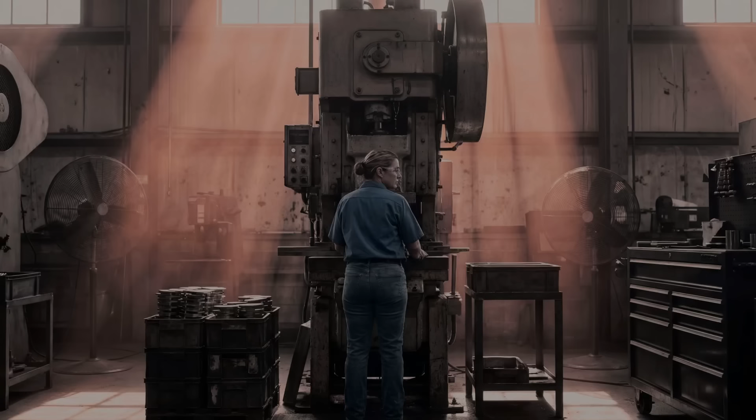In 1998, a 43-year-old woman in Iowa was operating a punch press at a machining facility on a hot June afternoon. She had worked at the plant for 6 months. The press was a simple machine. It held an upper die and a lower die, and when she stepped on the foot treadle, the ram came down with several tons of force, punching a shape out of a sheet of metal.

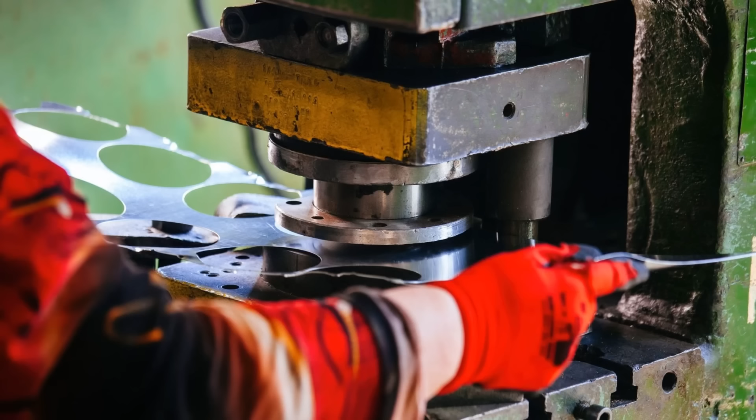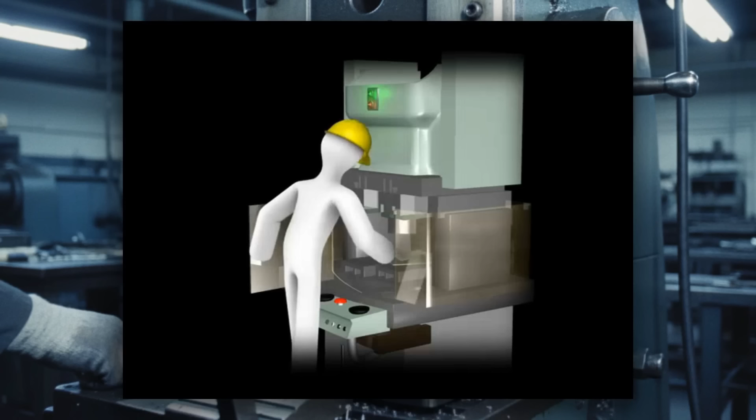The cutout piece, called a knockout, was supposed to drop through the die into a scrap tray below. This time, the knockout did not drop. It stuck. She reached in to clear it. What happened next took less than a quarter second. The ram came down again.

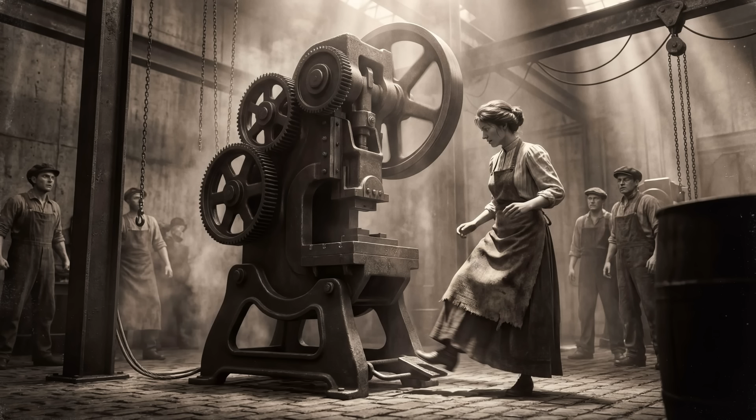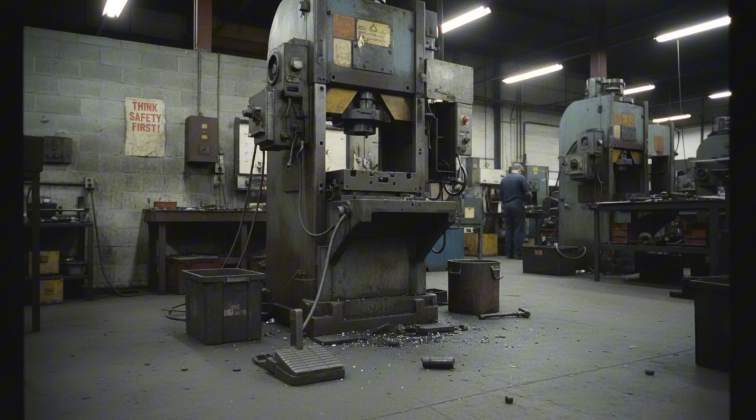The investigation could not determine whether she accidentally bumped the foot pedal or whether the press repeated on a mechanical fault. But the press cycled and the ram struck her in the chest. She was transported to the hospital and pronounced dead 90 minutes later. The scrap tray that should have caught the knockout had been removed from the machine, defeating the one barrier between the operator and the point of operation. She was killed by a piece of scrap metal that should have fallen through a hole.

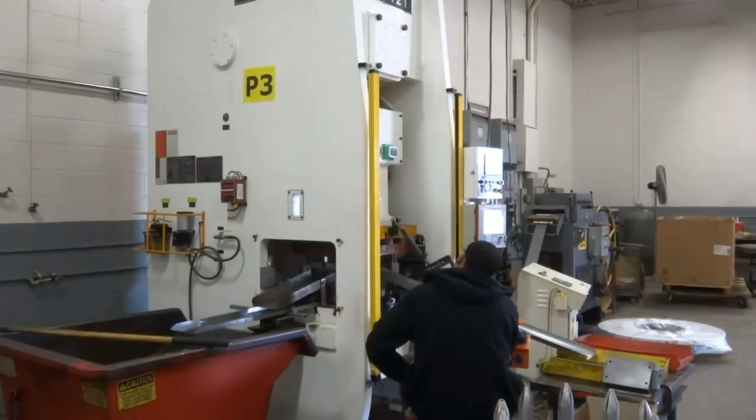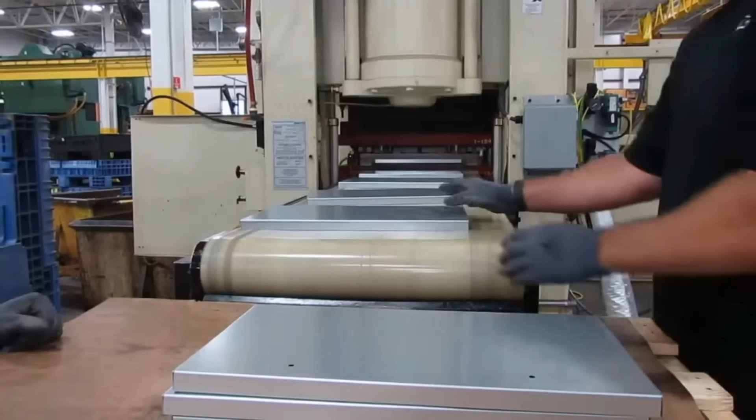That was the punch press. A machine so fundamental to modern manufacturing that every car you have ever driven, every appliance in your kitchen, every steel cabinet, filing drawer, and electrical box was born from one. And a machine so efficient at destroying the hands of the people who operated it that federal safety investigators called it the leading cause of workplace amputations in America.

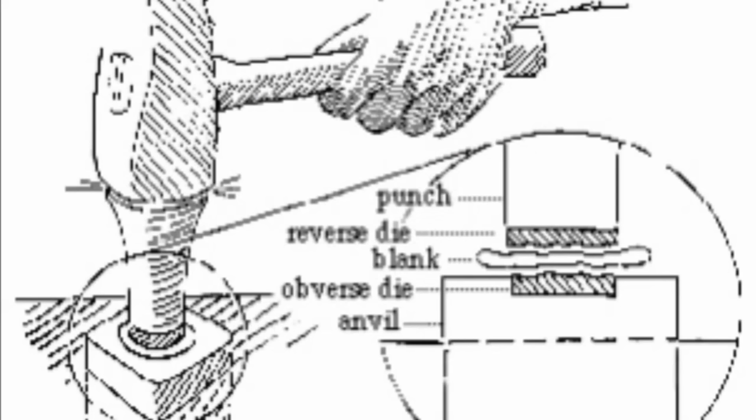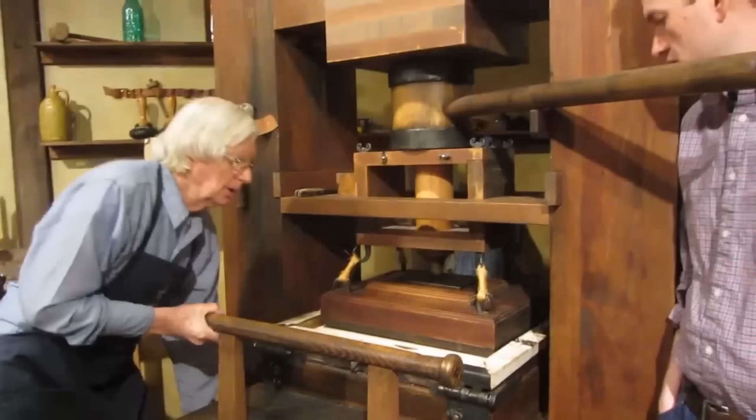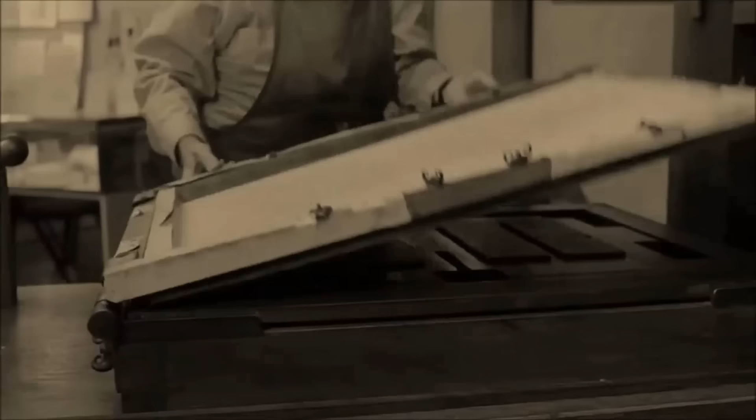The concept behind the punch press is ancient. People have been stamping metal since the Lydians minted the first coins in the 7th century BC, pressing gold and silver blanks between two engraved dies with a hammer blow. In 1550, a German goldsmith named Marx Schwab built the first screw press for coining, using a massive screw mechanism turned by as many as 12 men to force the dies together. King Henry II of France imported Schwab's machines, but the process remained muscle-powered and slow for 300 years.

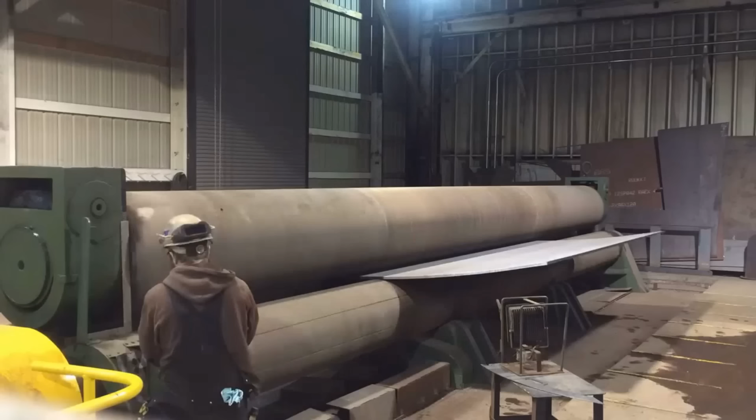It was the Industrial Revolution that turned a coining tool into a killing machine. In the mid-1840s, an American inventor named Joseph Francis built steam-powered presses capable of stamping large sheets of iron into corrugated shapes for boat hulls. Around 1870, the American company Bliss and Williams began marketing the first eccentric mechanical presses, machines that used a motor-driven flywheel, a crankshaft, and a connecting rod to convert spinning motion into a violent downward stroke. These presses could punch holes through half-inch steel plate at 100 strokes per minute.

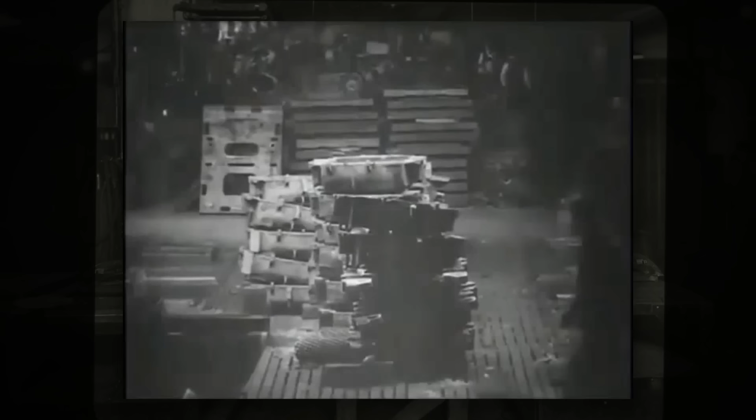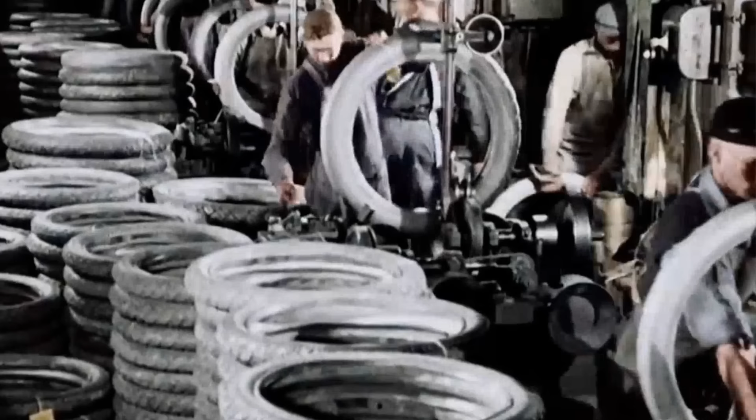In 1890, a German bicycle manufacturer discovered that stamping parts from sheet metal was faster and cheaper than forging or casting them. Suddenly, every factory wanted presses. By the time Henry Ford opened his Highland Park plant in 1910, rows of stamping presses were punching out crankcases, fenders, and body panels for the Model T. Ford resisted the technology at first. His engineers had to convince him that stamped steel parts were as good as die-forged ones. But when his factory could not keep up with demand, Ford had no choice.

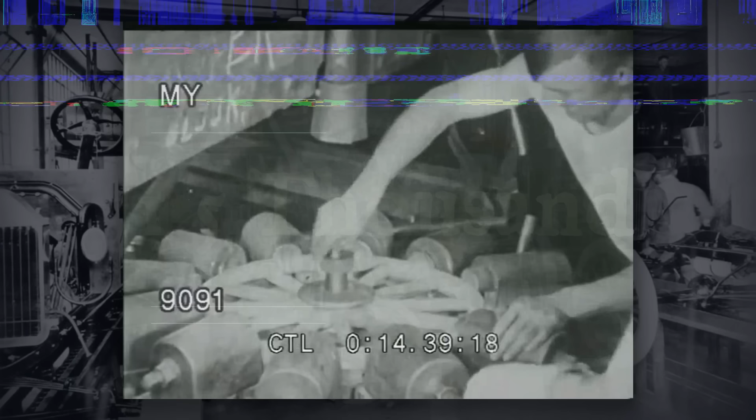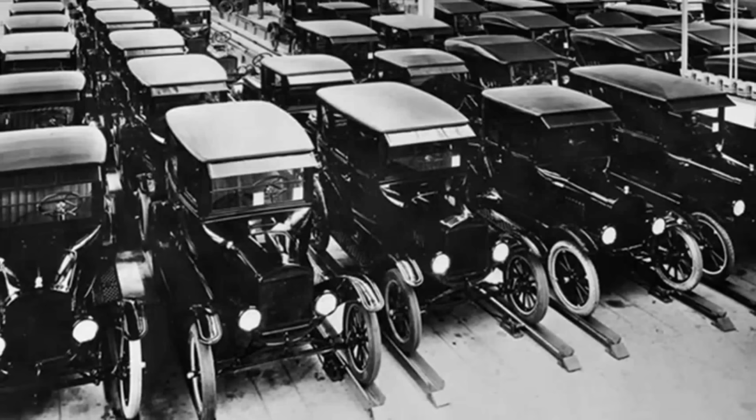By 1914, Highland Park had 15,000 machine tools, many of them stamping presses, producing parts for a car that rolled off the line every 93 minutes. The punch press did not just serve the auto industry, it built it. Here is how the machine worked, and here is why it took so many hands.

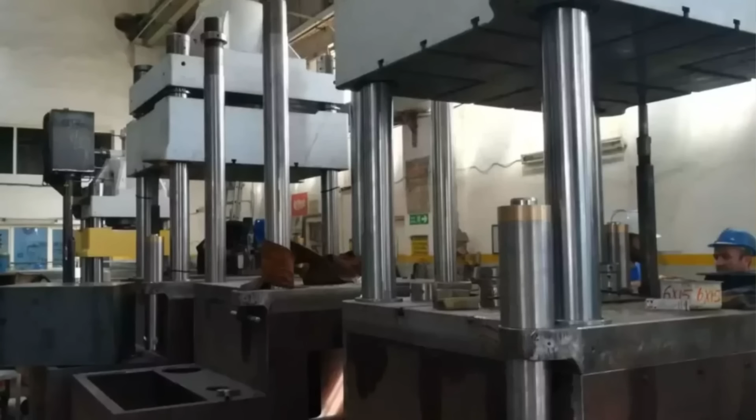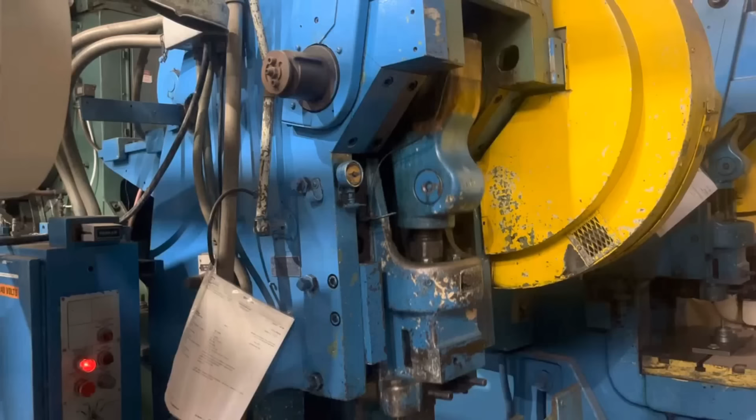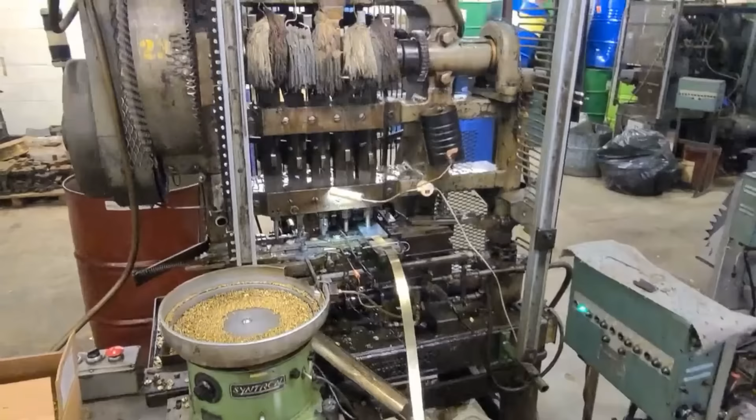A mechanical punch press has a heavy iron frame shaped like the letter C, with a flat bed at the bottom and a ram that slides up and down at the top. The ram is connected by a pitman arm to a crankshaft, which is connected through a clutch to a spinning flywheel. The flywheel stores the energy of an electric motor and spins continuously. When the operator triggers the clutch, the flywheel's energy is transferred to the crankshaft, which drives the ram downward. A punch attached to the ram slams through the sheet metal and into a matching die below. The entire stroke happens in a fraction of a second.

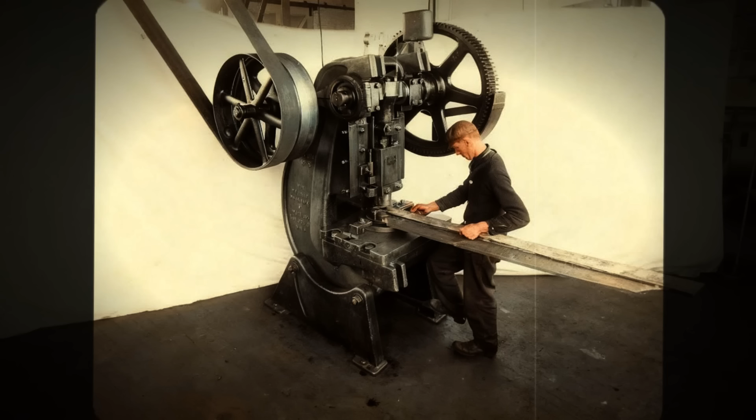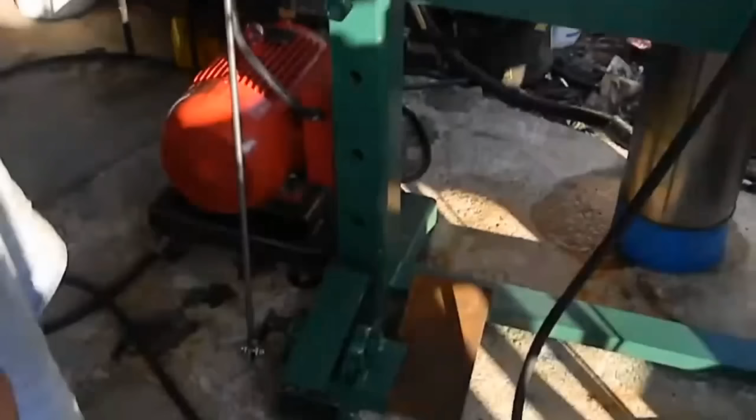Now here is the critical part. On older machines, which dominated American factories for most of the 20th century, the clutch was what engineers call a full revolution type. Once the operator tripped it by stepping on a foot treadle or pressing a palm button, the clutch engaged, and the crankshaft completed an entire 360-degree revolution before it could stop.

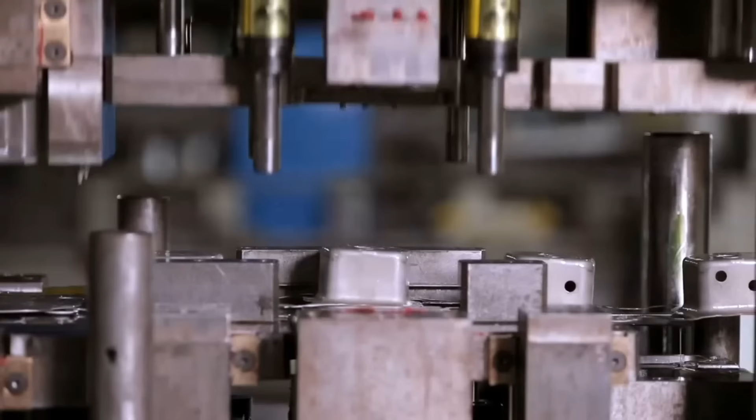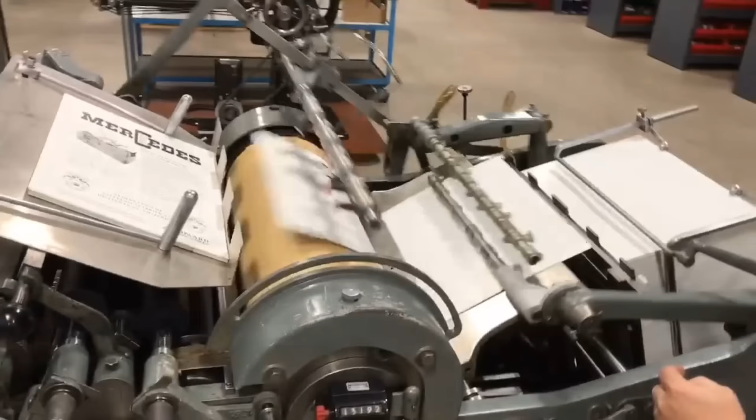The ram went down, came back up, and only then returned to rest. There was no emergency stop. There was no way to interrupt the stroke. If the operator's hand was inside the die when the treadle was pressed, whether by the operator's own foot, by a falling object, or by a coworker bumping the pedal, the ram completed its full cycle regardless. By the time the human brain registered the mistake, the metal had already closed.

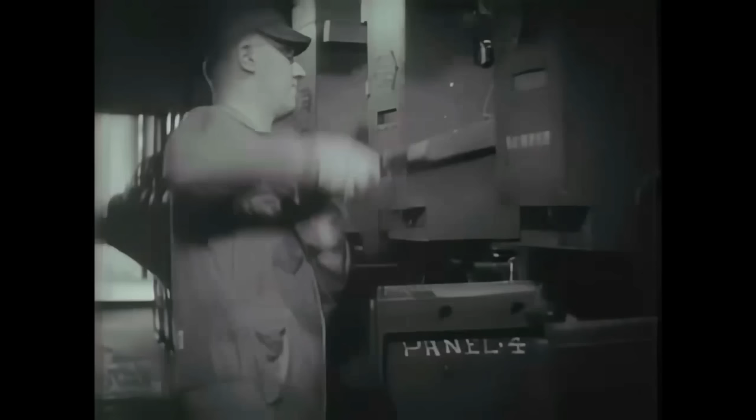Could you imagine standing at a machine for 8 hours, reaching your hand into the same gap 500 times a shift, knowing the machine cannot stop once it starts?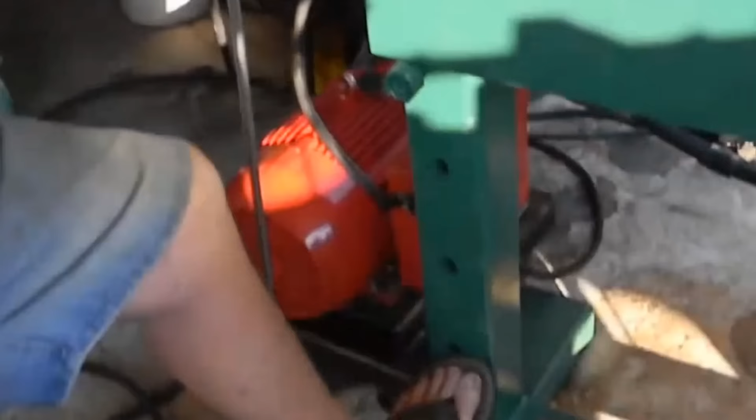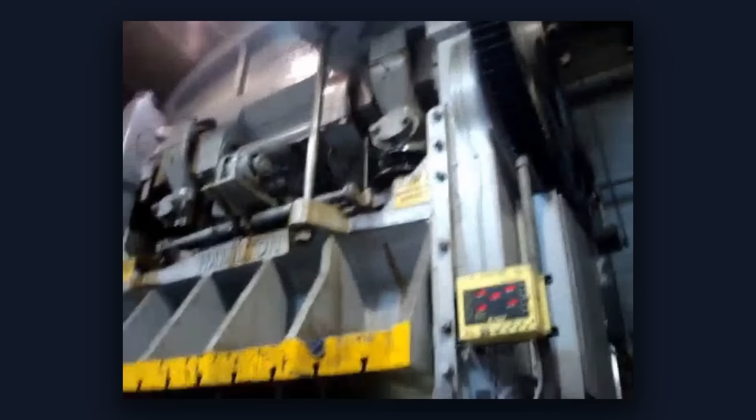The operator's daily task was numbingly repetitive and extraordinarily dangerous. Take a blank sheet of metal from the stack. Place it on the lower die, position it precisely. Pull your hands back, step on the foot treadle, the ram drops, the punch cuts, the finished piece ejects, or the operator reaches back in to remove it. Repeat. In high-volume operations, the press might cycle at 60, 80, or 100 strokes per minute.

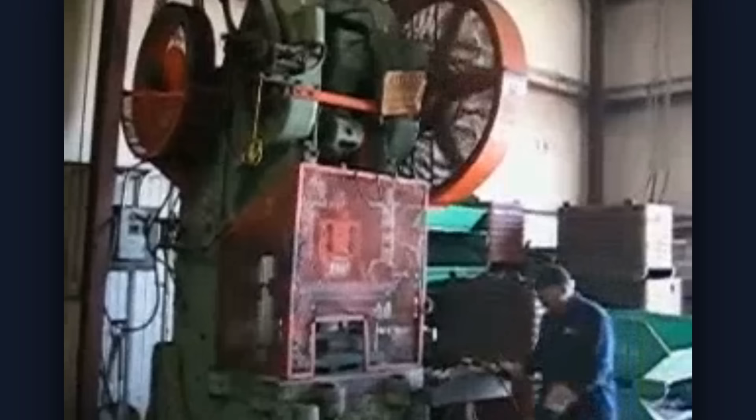The operator's hands were in and out of the point of operation with every single stroke. Everything depended on the operator pulling free before the ram closed. The safety margin was measured in milliseconds. The foot treadle that controlled the press was the worst possible design for this task. The operator's hands and feet were doing two completely different things. The hands were reaching into the die space. The foot was hovering over the pedal that would bring the ram down into that same space. A slip of the foot while the hands were still inside was the textbook path to amputation.

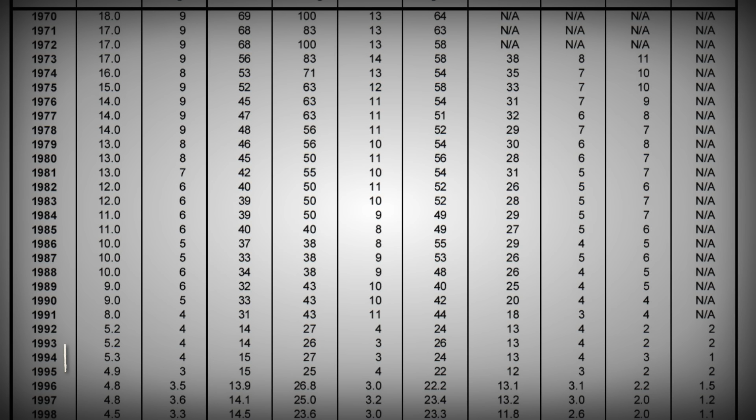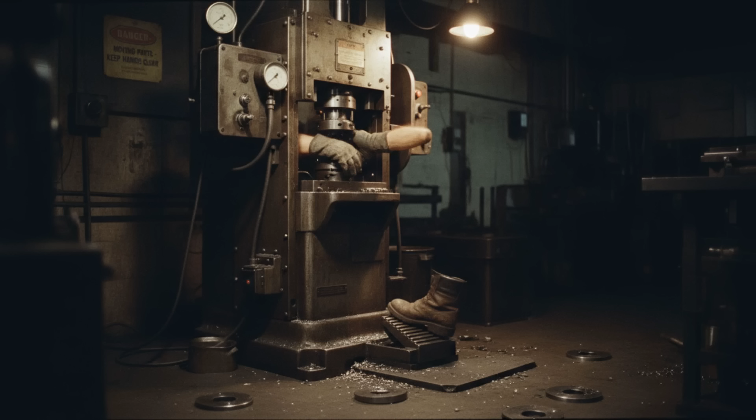The data proved it. An OSHA report covering injuries from 1975 to 1983 found that of 2,908 reported mechanical power press injuries, 62% involved foot-controlled presses. Only 30% involved hand-activated presses. The most frequent cause of injury listed in the reports was accidental trip of the foot pedal while the operator's hands were inside the die.

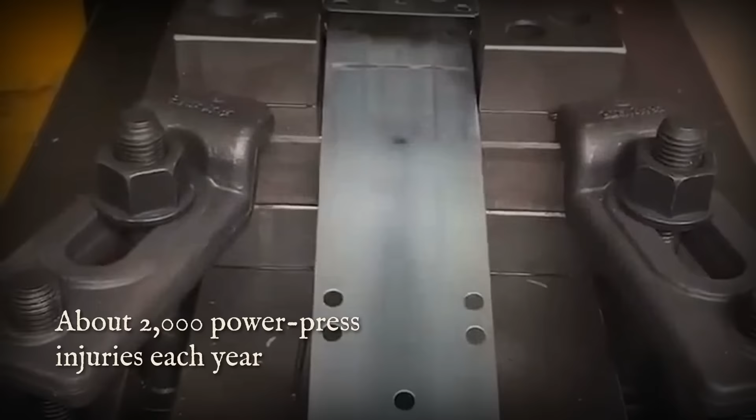The numbers were staggering. In 1980, the Bureau of Census counted approximately 151,000 mechanical press operators working in the United States. Bureau of Labor Statistics data showed that around 20,000 workplace amputations occurred every year nationwide. Of those, between 1,600 and 2,000 happened to power press operators alone. That was 10% of every amputation in every industry in America, from one type of machine.

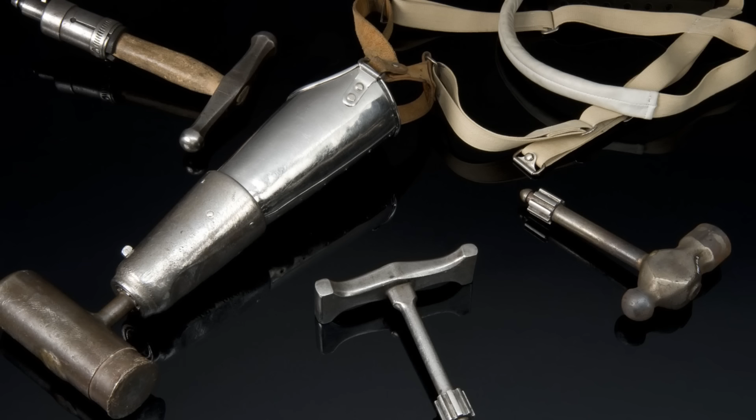Injury statistics compiled by OSHA found that 49% of all mechanical power press injuries resulted in amputation. Nearly 1 in 2. When a power press hurt you, it did not give you a bruise or a cut. It took a piece of you home with it.

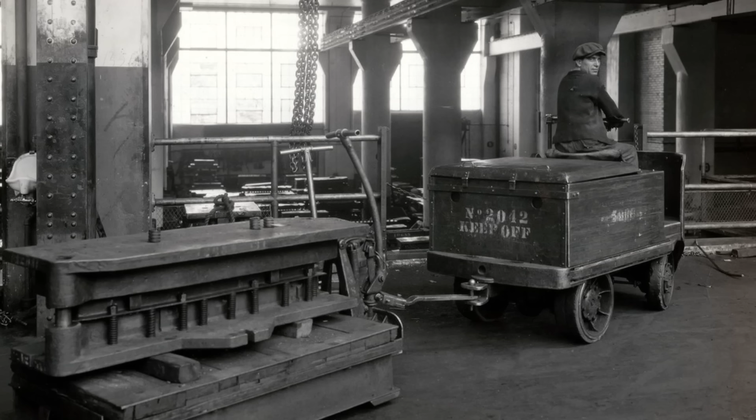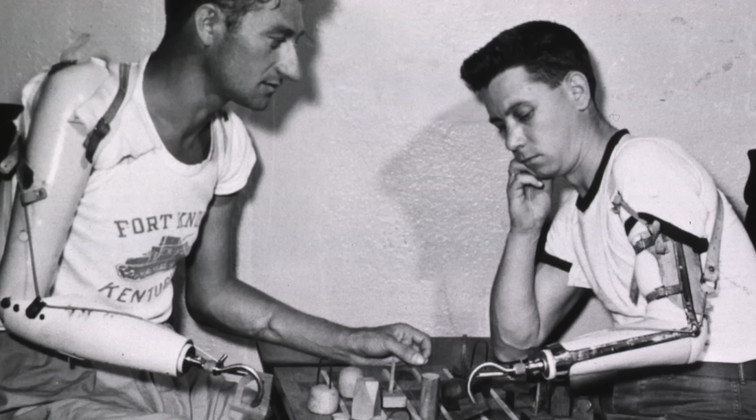A Michigan State University study of work-related amputations found that on average 52 Michigan workers per year lost part of their hand to a press. Workers injured by a press were twice as likely to lose multiple fingers compared to any other type of machine. In 20% of the cases, they lost more than just the fingertips. Males sustained more than 4 times as many amputations as females, and for both sexes, the highest rates hit workers in their 20s. The case reports read like dispatches from a small, invisible war.

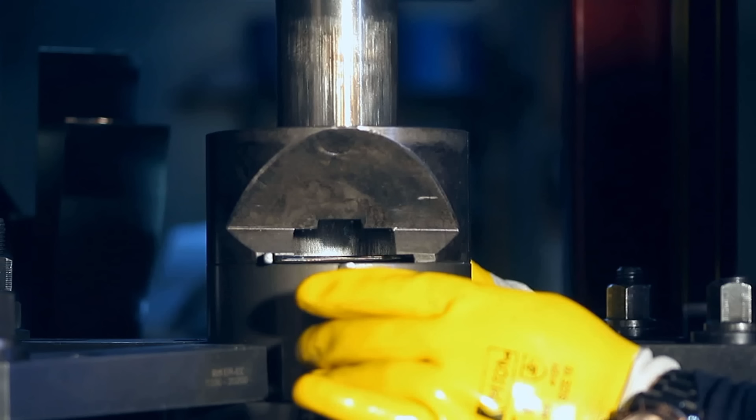A 19-year-old male used both hands to unjam a mechanical press. It engaged while his hands were inside. He lost the index, middle, ring, and little fingers on his right hand at the base. His left hand was crushed. A 21-year-old female had her left hand caught. 3 fingers were unsalvageable and surgically amputated.

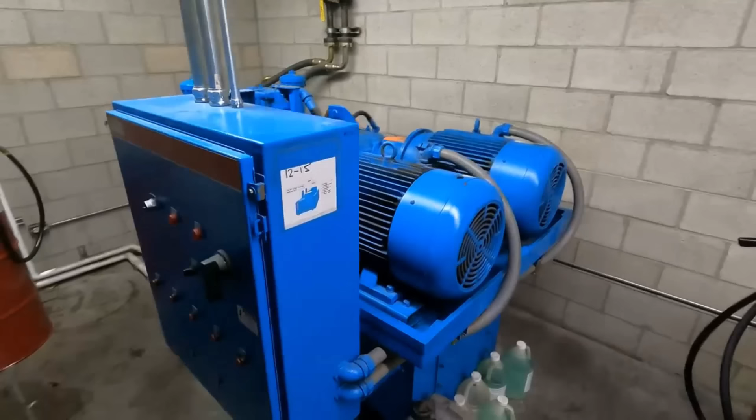A 46-year-old female had her right hand caught in a hydraulic press that possibly malfunctioned. She sustained amputations of 4 fingers. She was unable to remove her hand from the machine until the fingers broke off. A 30-year-old male had 1.9 tons come down on his left hand. 3 fingers were surgically removed.

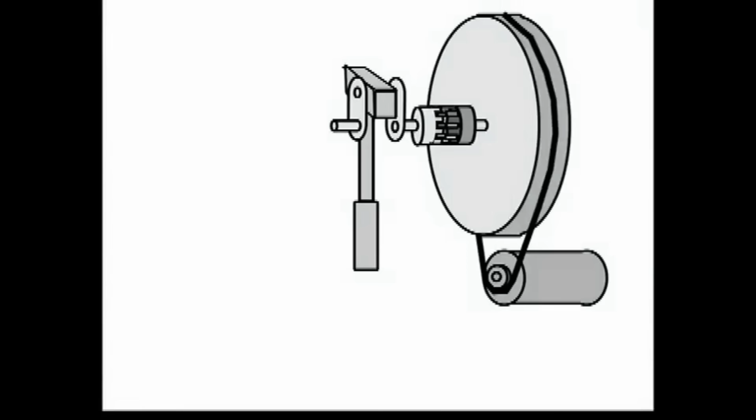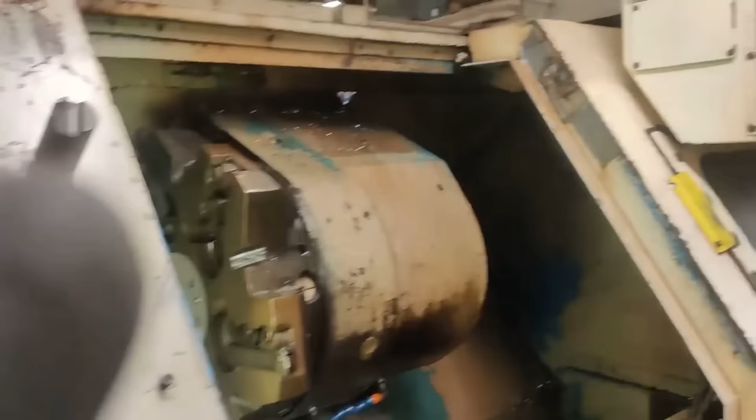A 44-year-old male had his head crushed in a cycling press during a job setup. The safety devices had not been activated. He died. A 26-year-old male was crushed and killed in a bench draw machine after pressing the wrong button on an unlabeled control panel. The carriage returned at full speed. He had been operating the machine for approximately 3 weeks.

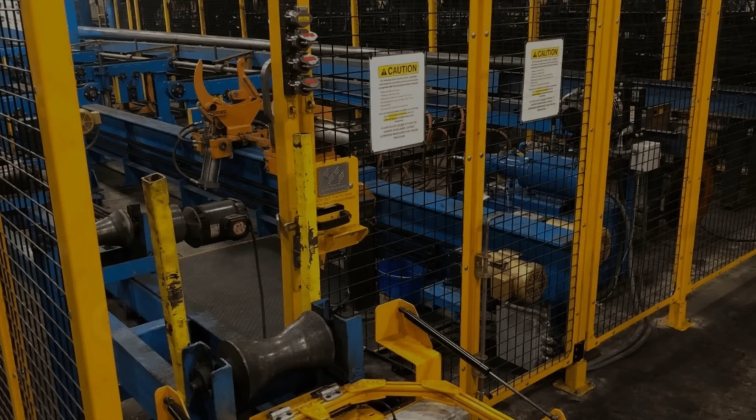You are probably wondering whether safety devices existed. They did. That is what makes the story worse. Engineers developed safety devices over the decades. Barrier guards enclosed the die, but they made loading parts difficult, so operators removed them.

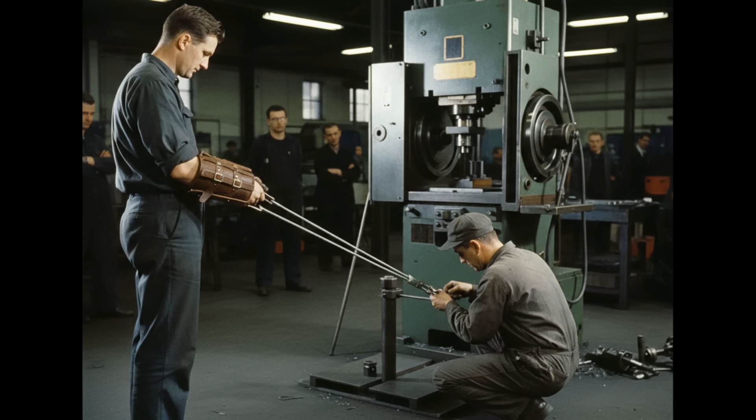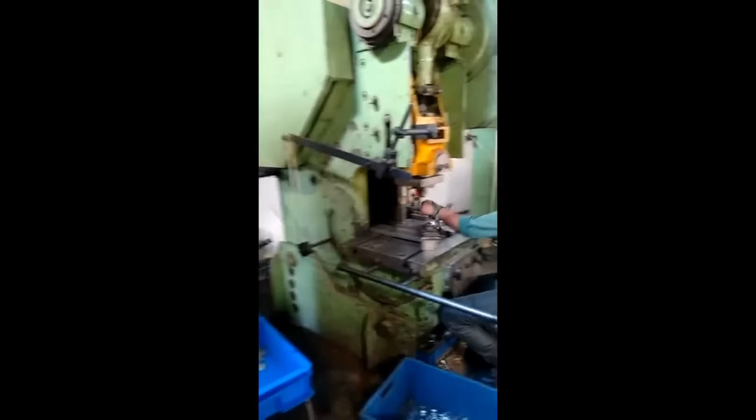Restraint devices strapped an operator's wrists to cables that physically prevented the hands from entering the die, but they required individual adjustment for each worker's arm length, and they were rarely readjusted between shifts. Pullback devices yanked the hands clear when the ram descended. Sweep devices, mechanical arms that swatted the operator's hands out of the way, were eventually banned by OSHA for being unreliable and sometimes injuring the operator.

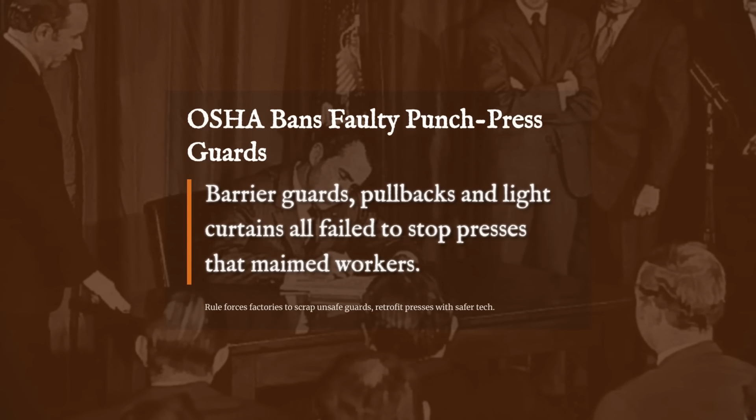The two-hand control was the breakthrough. The operator had to press and hold two palm buttons simultaneously throughout the downstroke, keeping both hands accounted for on every cycle. However, it only worked on part revolution clutch presses, the newer kind that could stop mid-stroke. On a full revolution press, two-hand controls were useless because the machine could not stop once the stroke began.

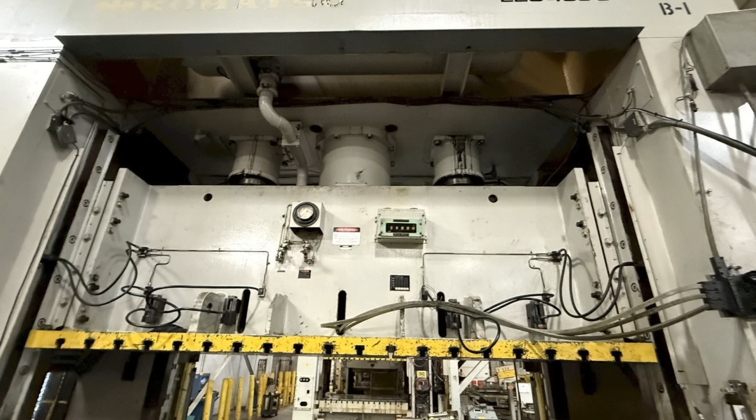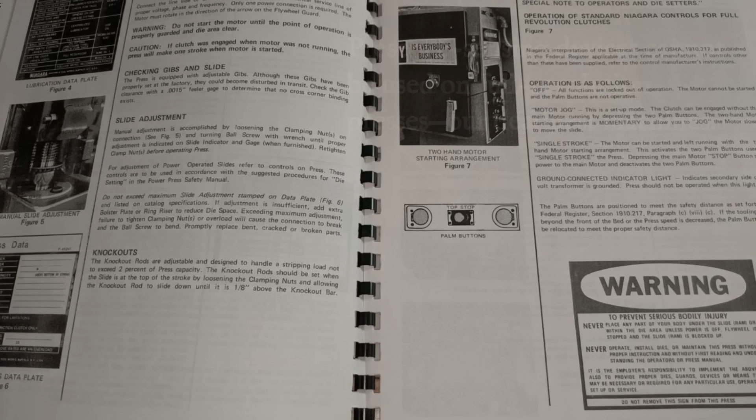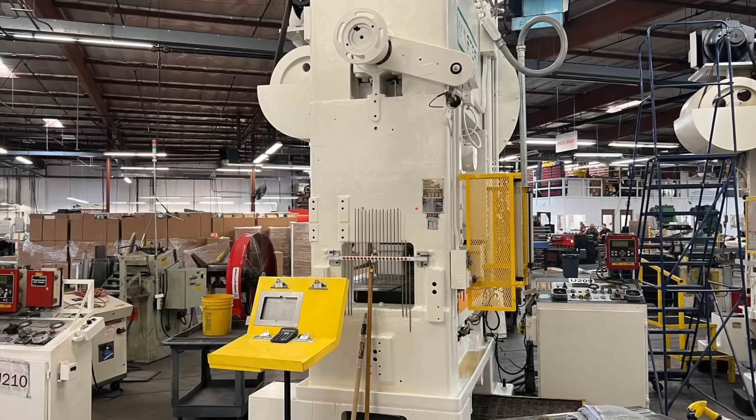The light curtain, an invisible grid of infrared beams across the die opening that would halt the press the instant a hand broke a beam, had the same limitation. OSHA's own regulations stated it plainly. Presence sensing devices may not be used on machines using full revolution clutches. The most dangerous presses in America could not use the most effective safety technology available. And those old full revolution presses stayed in service for decades.

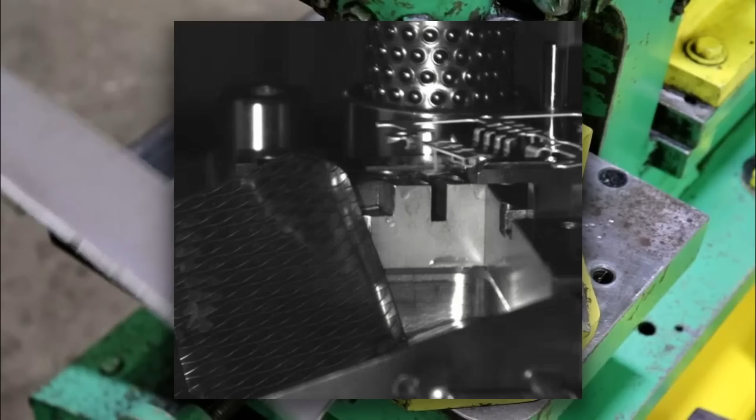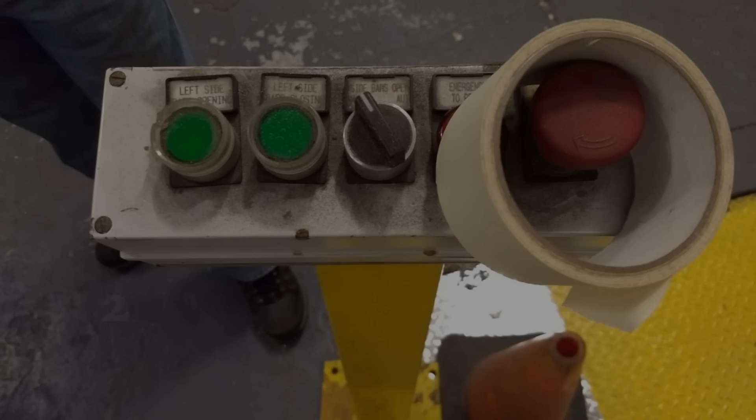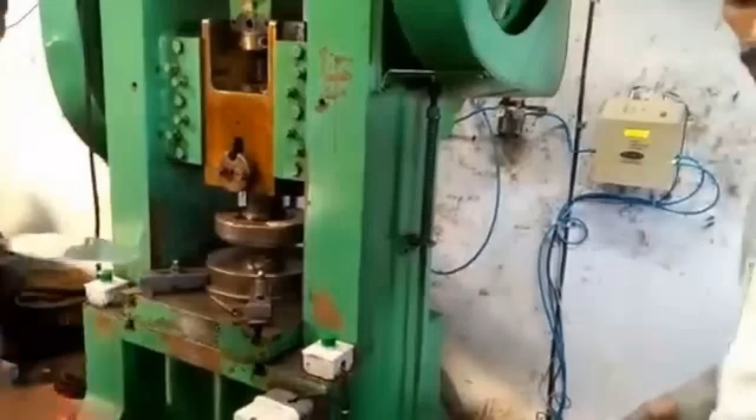NIOSH published Current Intelligence Bulletin 49 in May 1987, and the findings were damning. Researchers measured the actual hand speeds of press operators and found that 79% of young male operators exceeded the OSHA standard hand speed of 63 inches per second. The fastest hand speed recorded was 142 inches per second, more than double the standard used to calculate safe palm button placement. A young male operator could release the buttons and get his hand into the die before the ram stopped. The safety formula was wrong. The guards were not fast enough to protect the people most likely to get hurt.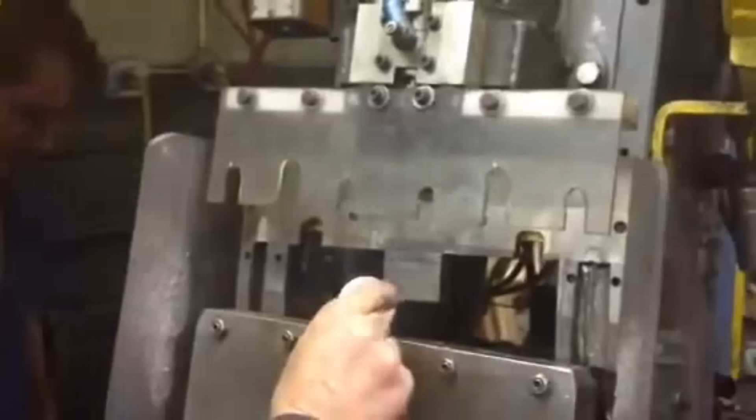The problem ran deeper than any single regulation. Operators sometimes defeated safeguards deliberately, removing or overriding guards for convenience or to increase productivity. On machines that stamped differently shaped parts, each of which needed a different guard, it could take more time to install the proper safeguarding than to run the entire job. Pull-out and restraint devices required individual adjustment for each worker's arm length, and that adjustment was frequently skipped between shifts.

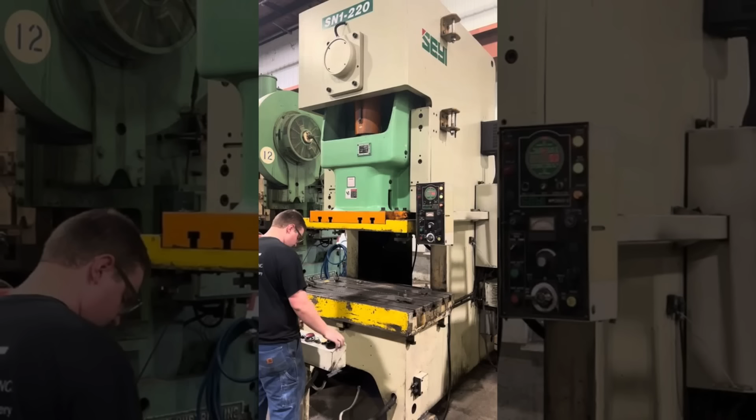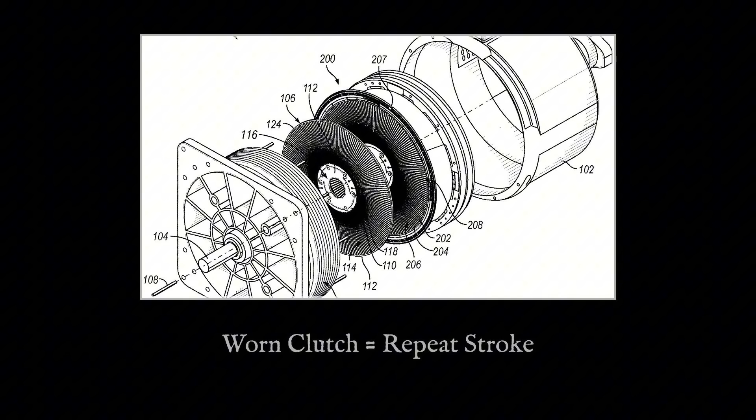Employers failed to maintain presses, allowing clutch and brake mechanisms to wear until a press that was supposed to make one stroke would repeat, cycling again when no one had touched the treadle. The repeat stroke, an unintended second cycle caused by a worn clutch or a sticky engagement mechanism, was one of the most feared malfunctions in any stamping shop. The operator would trip the press, watch the ram come down and go back up, reach in to retrieve the part, and the ram would come down again on its own.

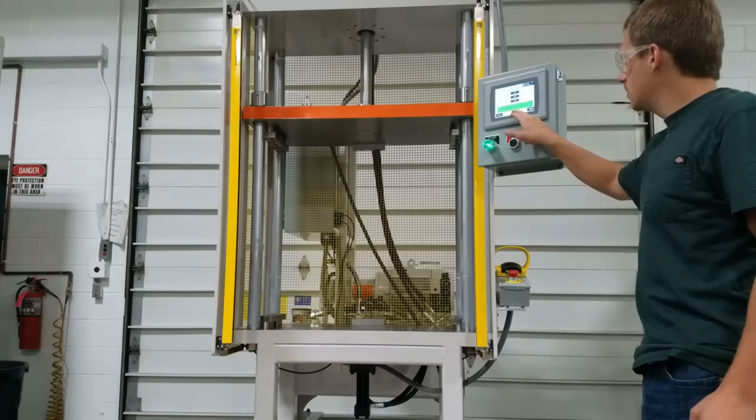Machine guarding has been one of OSHA's top 10 most frequently cited violations for as long as the list has existed. Fabricated metal product manufacturing, the industry that relies most heavily on punch presses, has consistently led all industries in machine guarding citations. The punch press did not become safe because someone invented a better guard. It became safer, slowly, because the guard was mandated, inspected, and enforced, one shop at a time, one citation at a time, one amputated hand at a time.

And even today, with light curtains, two-hand controls, part revolution clutches, and presence sensing interlocks, power press amputations have not been eliminated. OSHA still publishes point-of-operation injury reports for mechanical power presses. The injuries are still coming in: Ohio, Wisconsin, Illinois, Missouri, Pennsylvania. The same manufacturing states, the same cause listed again and again: accidental trip while hands were in the die.

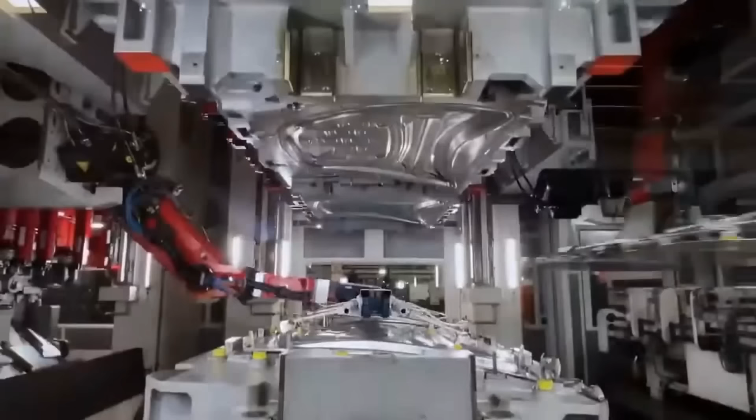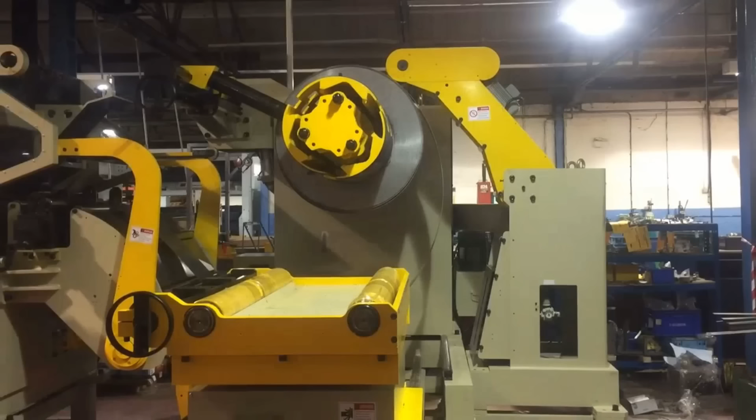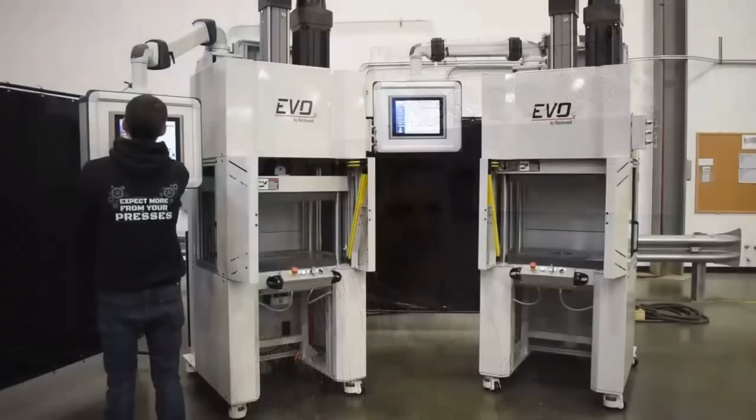The punch press is still the backbone of modern manufacturing. Every sheet metal part in a car, an aircraft, an appliance, a computer chassis, a filing cabinet, an electrical panel passed through a stamping press at some point in its life. Global production runs into the billions of parts per year. The machines are faster now, smarter now, safer now. Servo-driven presses can be programmed to slow down, speed up, dwell, and reverse with digital precision. Automated feeders remove the operator's hands from the equation entirely on high-volume runs.

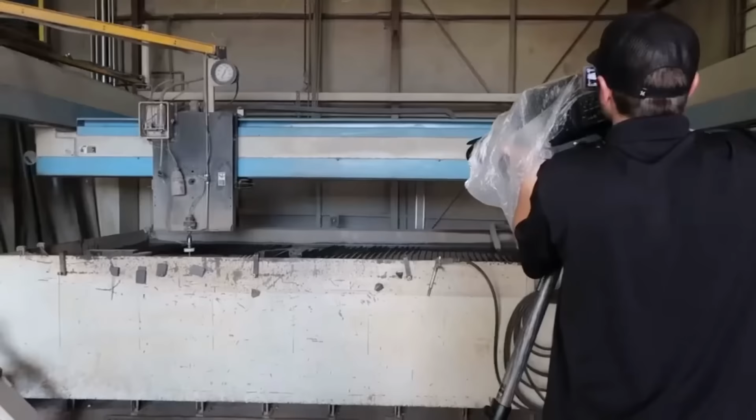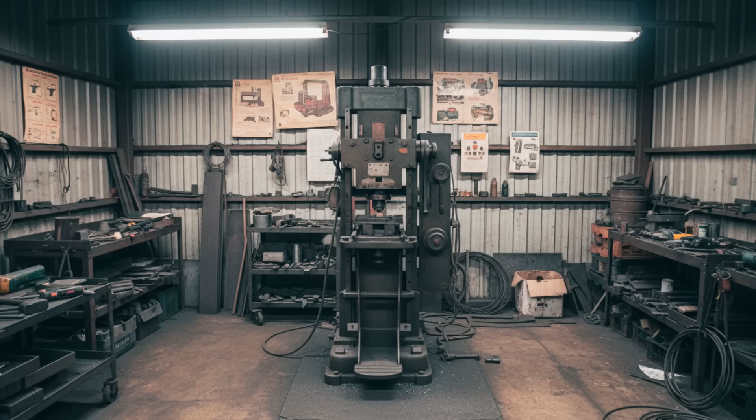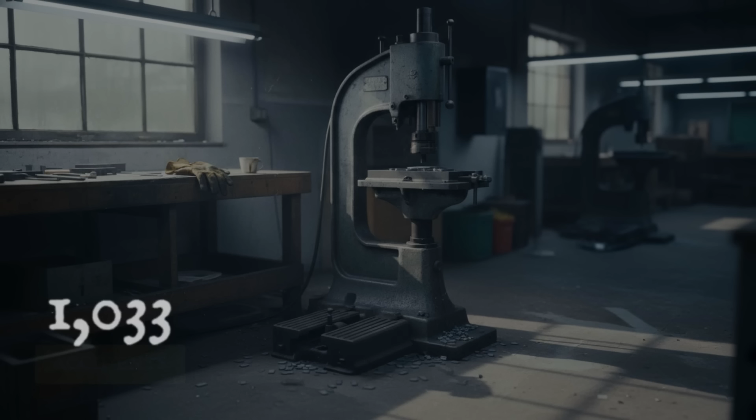But somewhere in America right now, in a small fabrication shop running short production jobs, an operator is standing at a C-frame press, placing a blank on the lower die, positioning it by hand, pulling back, and stepping on the treadle. The same motion, the same bet, the same fraction of a second separates a finished part from a missing hand. 1,033 times a year, someone loses that bet.